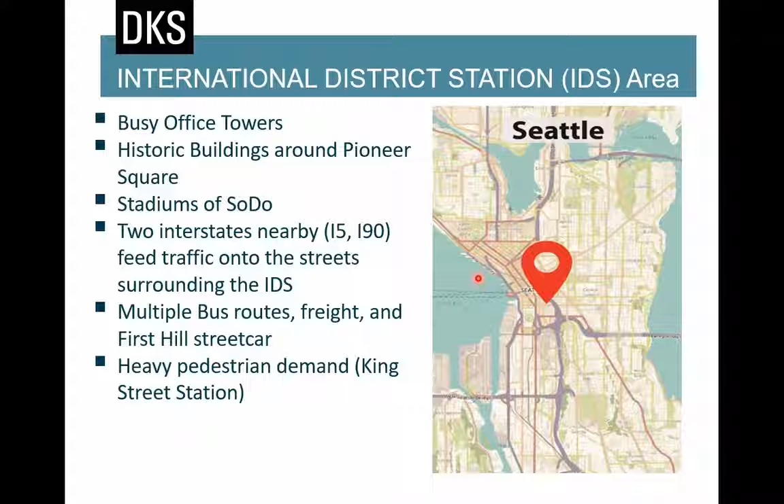this area. Because of the King Street station that is located at 4th and Jackson, we have a lot of peds in this area. So we have between 500 and 800 peds per crosswalk. So after I ordered the turning movement count, I looked at the report and I contacted the company like, are these numbers right? I want to verify the video. So they verified the video and I watched some of these videos. Yeah, some of these ped crossings are very busy because of the King Street station.

If we zoomed in a little bit, this is our study area. Again, it's in the southeast corner of downtown Seattle. And our focus area is basically 16 signalized intersections that are represented here in the black circles, and we have 14 unsignalized intersections. Our main focus is 4th and Jackson, but we also included all of these side corridors like 6th Avenue, 5th, Main, because as we'll be covering later on, King County Metro is interested in some rerouting, and these reroutes are going to use 6th Avenue and other corridors.

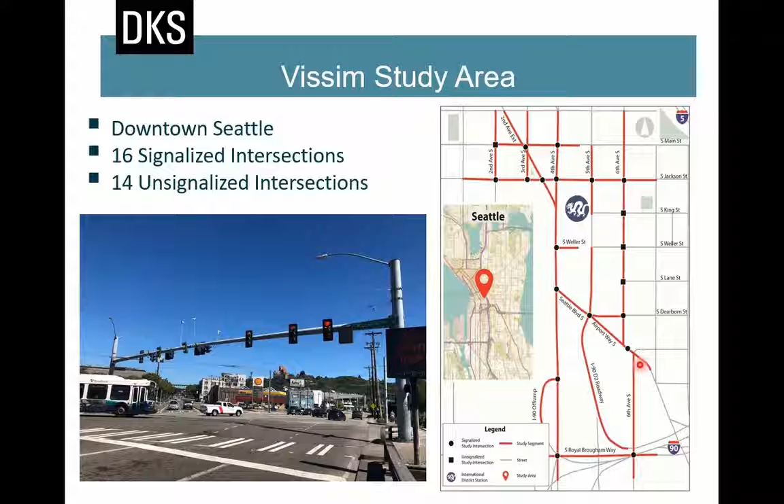For the geometry, we have some pretty unique and interesting intersections in here. As you can see here, one of the examples is the intersection of 5th and Seattle Boulevard. It's a 5-leg intersection. Here we have the D2 ramp. It's basically a transit ramp. If you are looking at the westbound approach, we have one westbound right turn lane and two through lanes. But for the downstream, we have one westbound right, one westbound left, and the middle lane is basically a shared through, right and left.

So here, if you're looking at northbound 5th, it's basically one lane. For the southbound, it's two southbound left turn lanes. If you're looking at southbound right, it's a slip lane. If you're looking here at the intersection of 4th and Jackson, we have here a right turn pocket lane because this is a very heavy bus area. After that, we have a BAT lane. Here we have two GP lanes, and another bus lane serving this transit area after crossing the intersection. So it will be nice to test Vissim 10 and how Vissim 10 is going to handle the conflict areas of some of these interesting intersections.

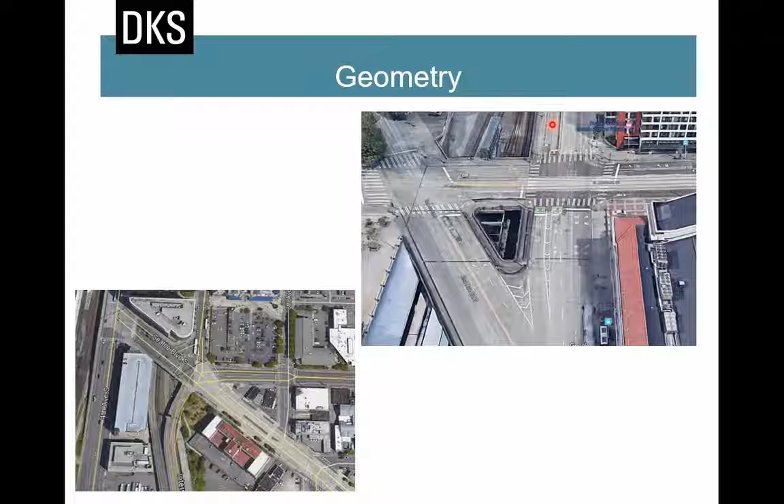What DKS was tasked to do. So basically our main scope is covering three main topics. The first one is to test the impact of all the upcoming route changes. So as I mentioned earlier on, King County Metro, Sound Transit, and Community Transit are making a lot of changes because of the D2 ramp closure. They are also changing the headways of these buses that are running along 4th Avenue.

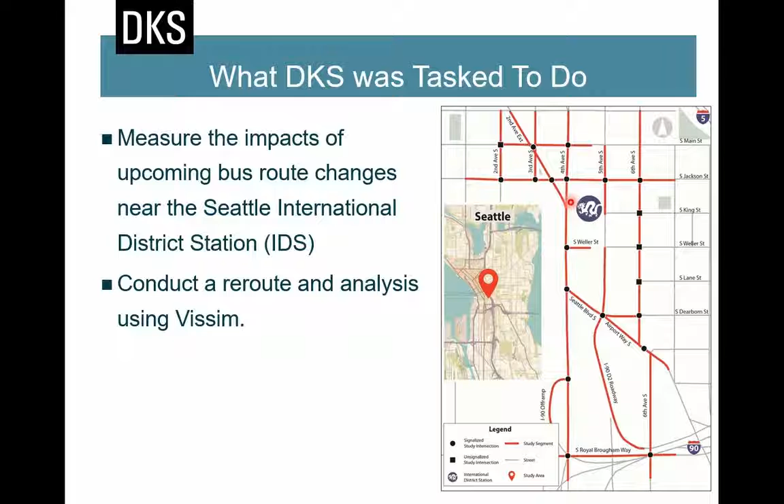They also want to test which reroute they should consider. Should they consider this alternative, like instead of moving along northbound 4th, should they take this route, or should they take north and after that turn right at Seattle, then left again at 6th? They are also considering adding one more bus stop. So this bus stop at northbound 4th and Jackson is currently serving two 60-foot buses, and they would like us to consider adding a third 60-foot bus stop. So it's basically gonna be a longer bus zone.

Part of our scope is also to consider how we can improve the operation along 4th Avenue. So here for the I-90 off-ramp, the current configuration is basically 2 lanes and an eastbound right turn lane. And the middle lane can serve the eastbound right and eastbound left. So they were asking us what is the best channelization for this off-ramp. Should we keep the middle lane as it is right now, or should we change the configuration to something else? Which is pretty interesting because all of this needs a lot of iteration, a lot of testing.

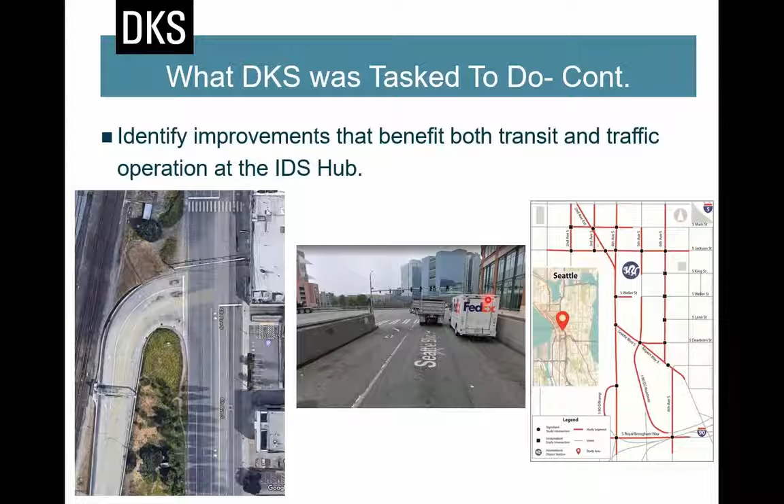Another example is the intersection of Seattle Boulevard and 4th Avenue. They also asked us if we can help them with this middle lane. Should we add it to the through-right or to the through-left?

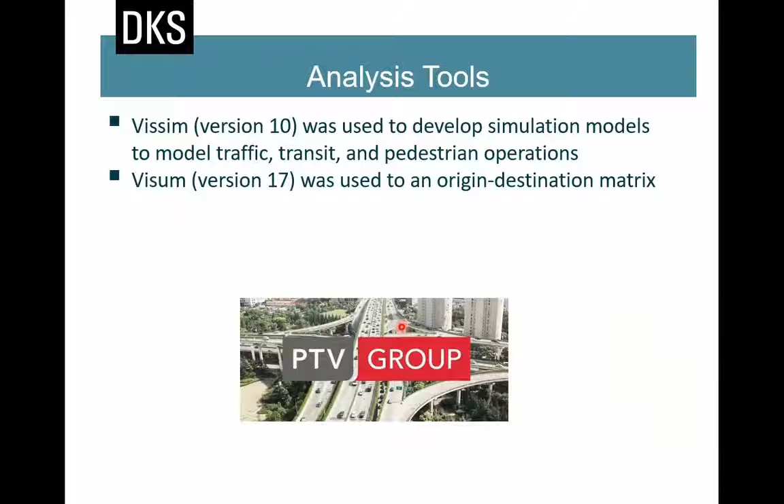The main analysis tools we used in here are basically Vissim 10 for the micro simulation work, and we used Visum 17 for the OD and static routes, and we used the dynamic traffic assignment for this work. My colleague Matt is going to cover some other slides.

So they wanted to look at some additional stuff that affected more of the GP traffic directly as well, and that was a couple turn restrictions. You can see the red dotted line paths are where the existing turns are available, but they wanted to take some of those out. So we had to account for that in the model.

And then just to touch on the congestion in this area, it's a pretty congested area. It's just south of downtown a little bit, downtown Seattle. So AM, PM peaks are very busy, and this area is very busy in both peaks. The inbound, so northbound on 4th Avenue, is busier in the AM peak, so the queues can extend a long ways there. It's still busy in the PM, but a lot of the PM traffic is more in the southbound direction.

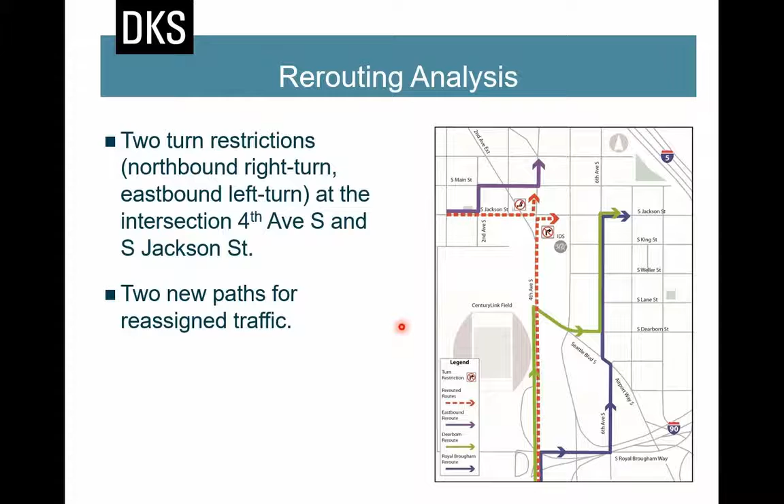So we did an alternatives analysis. They had several alternatives that they wanted us to test. It was only on existing years, so that was kind of nice. We didn't have to project out any volumes or anything because they wanted to capture the impacts of doing these things right away. So existing conditions model with current traffic volumes, current traffic signal timing, transit routes created and calibrated to generate a baseline model for our comparisons. And then we had 4 other alternatives.

And then transit, so in addition to what Sherief was describing, there's an existing transit tunnel that runs underneath downtown Seattle. So when we did this analysis, the light rail and buses were both running in the tunnel. So as part of this project, they wanted to pull all the buses out of the tunnel, and so we had to measure the impacts that would have on the surface traffic.

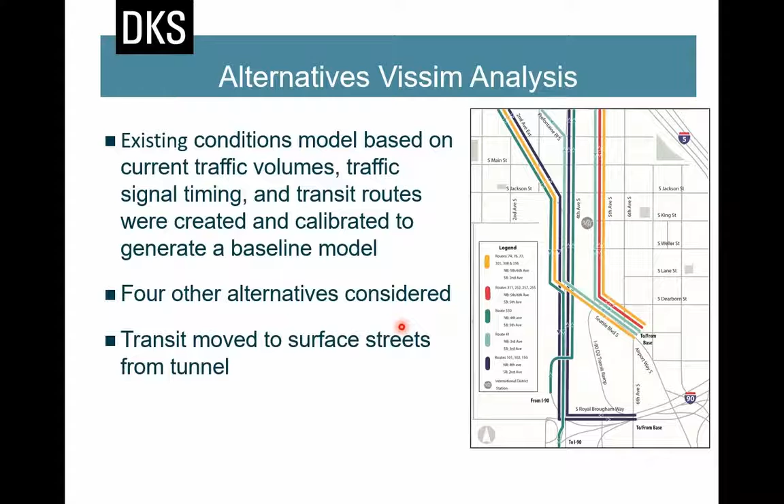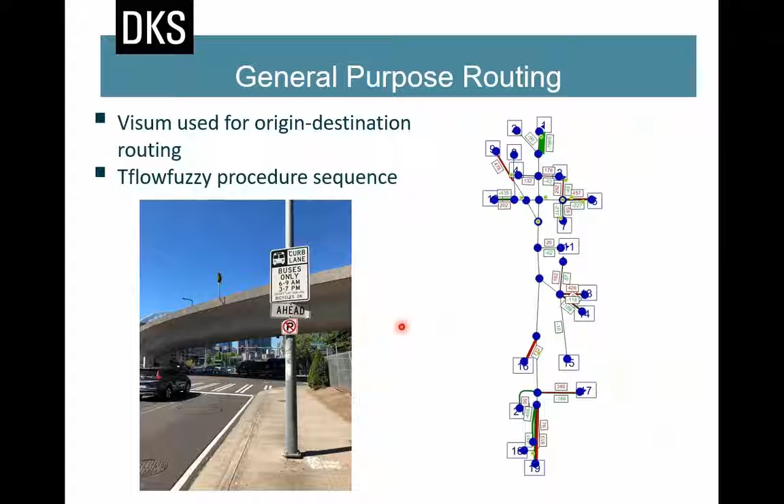So we used Visum to generate the OD matrix so that we could import that into Vissim. Visum used the TFlowFuzzy procedure sequence, and then we brought that into Vissim and used DTA to generate the static routes.

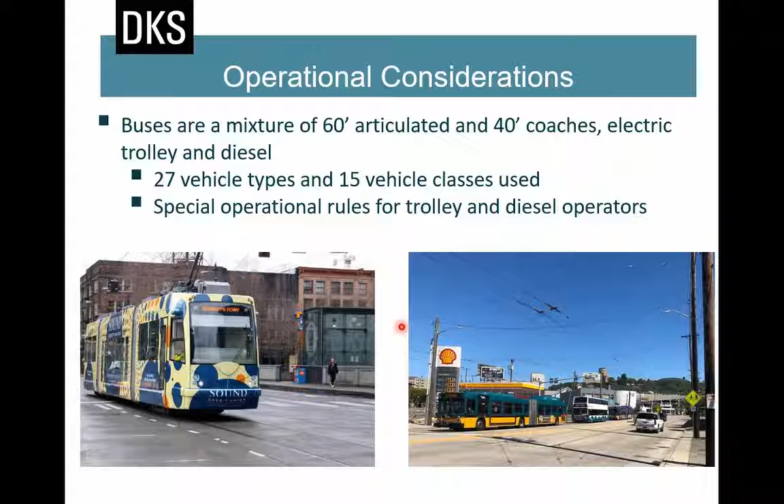One thing to consider with this as well is that a lot of the modeling was dependent on how well the bus stops could perform, so it had to do with bus stop capacity. We had to use 27 vehicle types and 15 vehicle classes so that we could break up the different types of coaches in the model. King County has a mixture of 60-foot and 40-foot buses, and then they have a mixture of electric trolley and diesel buses. And for any particular route, they can have a mixture of all 4 of those things. So we need a lot of vehicle types so we could capture the stop capacity well.

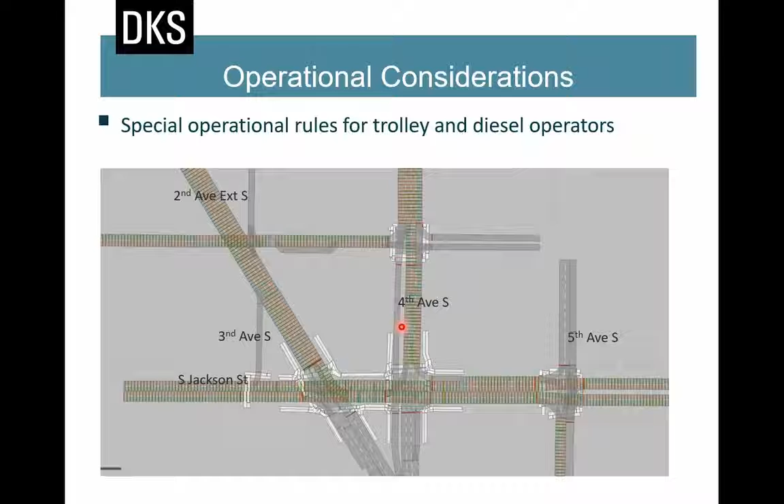Essentially what these are doing is there's streetcar and trolley bus operations here. Typically in most areas there's only one set of trolley wires, so they can't actually pass each other. The streetcar obviously can't change lanes, but the trolley buses can. So we needed to incorporate something that would make it so that the trolley buses couldn't pass each other, and they couldn't pass the streetcars either. And along with the trolley bus operations, there's lots of special operational rules that apply to them, and Sherief will cover some of those.

So as Matt mentioned, just setting up the priority rule was pretty tricky. These are some of the parameters we used for the priority rule. We basically wanted to make sure that trolley buses are not passing the streetcar or the other way around. Before putting in any of these priority rules, we found trolley buses are passing the streetcar. The model was running in a pretty funny way.

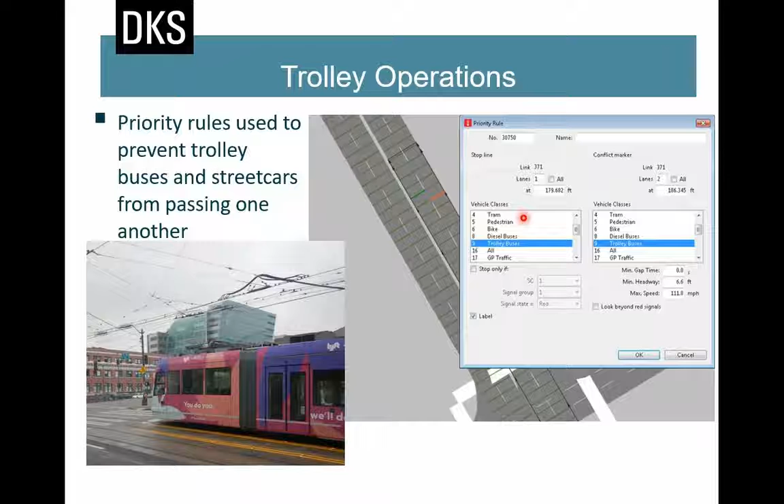We also have some pretty interesting special work zones because of all of these wires. So we went to the field, we collected where these wires are located, and we also set some meetings with our client, King County Metro. We wanted to mimic all of these wires in our Vissim model. But more importantly, we wanted to mimic the driving behavior.

So we started to implement some of these reduced speed areas in our Vissim model. At some specific locations, all of these trolley buses are directed and they just got used to slowing down whenever they get into the intersection or are done going through the intersection.

So we started implementing some of these reduced speed areas. And they're instructed to slow down because if they drive too fast where the wires cross, it can pop the arms off, and then they have to go back there and try to get back on, because the bus stops because they don't have any power.

Yep. And there are some specific locations where they can cross each other, but these are basically like emergency locations. So they are directed not to pass each other unless it's an absolute necessity.

While we were working on this project, we had some different stakeholders. So number one, the three transit agencies gave us the bus routes and which corridors they are going to run on, but they didn't give us any schedule. And they asked us, can you help us with a future schedule for this one?

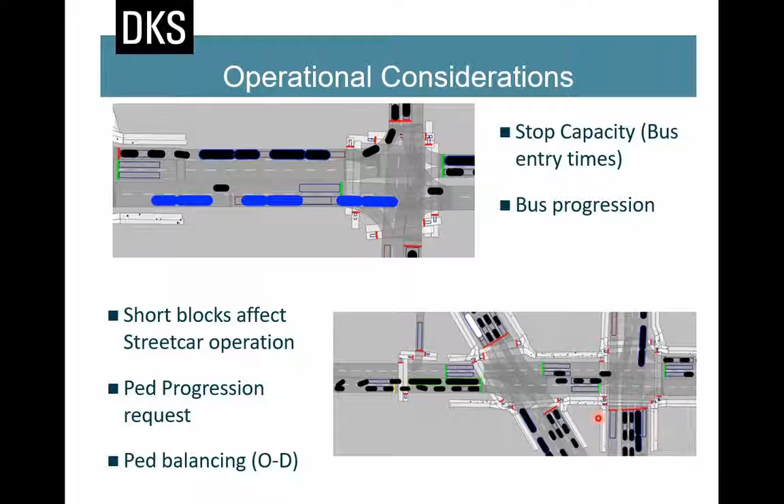For the lane change, based on our field work and the feedback we got from the transit agencies, south of the I-90 off-ramp, it's basically GP lanes, but north of the off-ramp, we have a BAT lane, and after that, the GP lanes. So if a bus is stopping at this bus stop on the east side of 4th and Jackson, and the bus is heading northbound, the bus will basically keep driving on this lane, after that drive on the BAT lane, till it serves the passengers at this intersection.

But if the bus is moving north without stopping at this specific bus stop, we found from our field observations that bus drivers, even if they have a BAT lane, don't really drive on the BAT lane. They prefer to just keep driving on these GP lanes without going through all the hassle, buses, GP, and all of the congestion at this intersection. They just skip the BAT lane and keep driving north on the GP lane. So calibration of this area was done using the lane change parameters in Vissim.

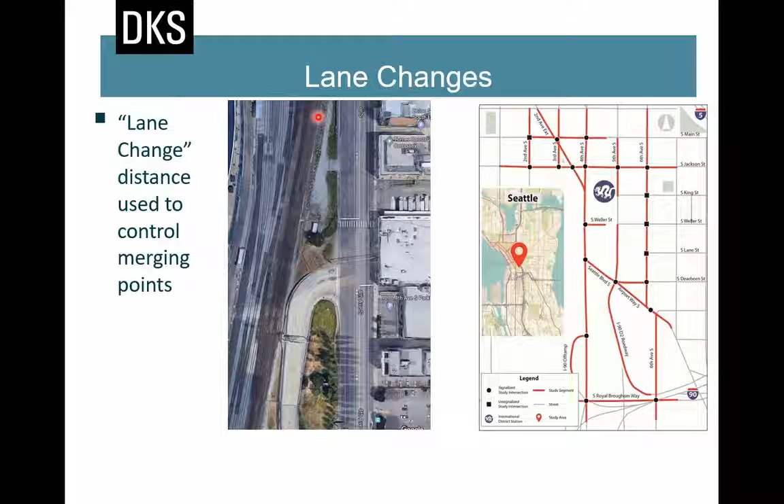Matt will cover a few more slides. So, like I mentioned earlier, we calibrated it. The calibration was mostly travel time based and then these other things as well. But the travel time was mostly focused on the transit since that was the best data source. And then we also calibrated on transit volumes since there is a lot of transit here.

So we incorporated, Sherief described some of the bus stations, some of the bus layover areas that they had there. So we incorporated deadhead buses and buses that were traveling to their routes and stuff like that. Just north of here, I know that 3rd Avenue has over 100 buses per hour in each direction. So there's a lot of buses in this area. And we calibrated based on general purpose volumes and then our field observed queuing.

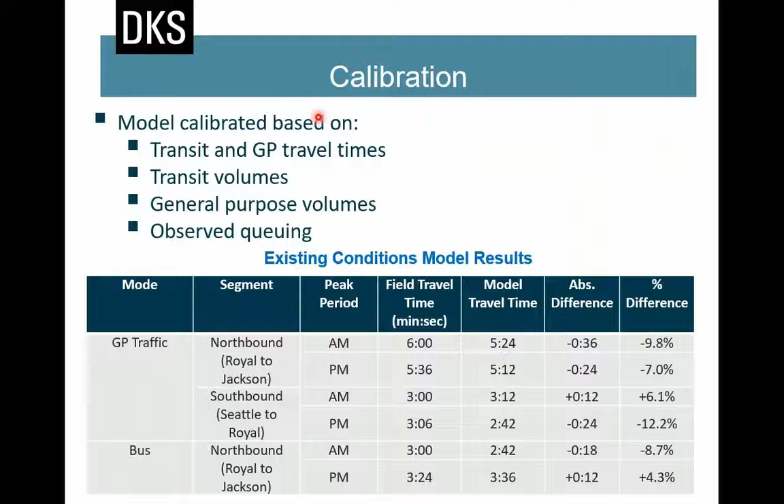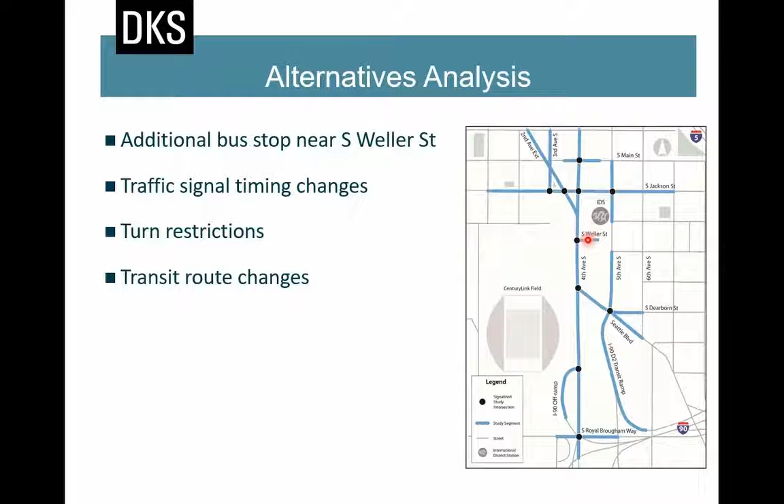So these are basically the alternatives we looked at. We looked at an additional bus stop near Weller Street, and then traffic signal changes, those turn restrictions that we previously described, and then transit route changes.

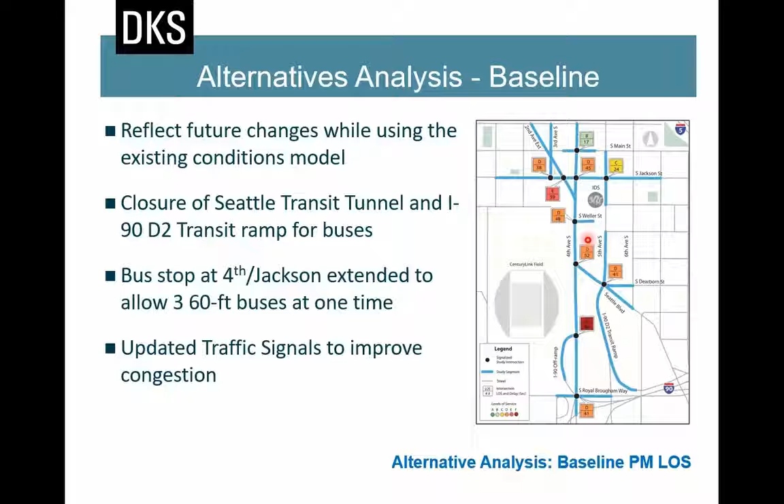So like I said earlier, all of our future things, we didn't have to go out into a future year. Everything was for the current year. And then we incorporated, like Sherief described, the closure of the I-90 ramp that was buses only, and then increased stop distance because it needed more capacity, and then updated traffic signals to improve congestion.

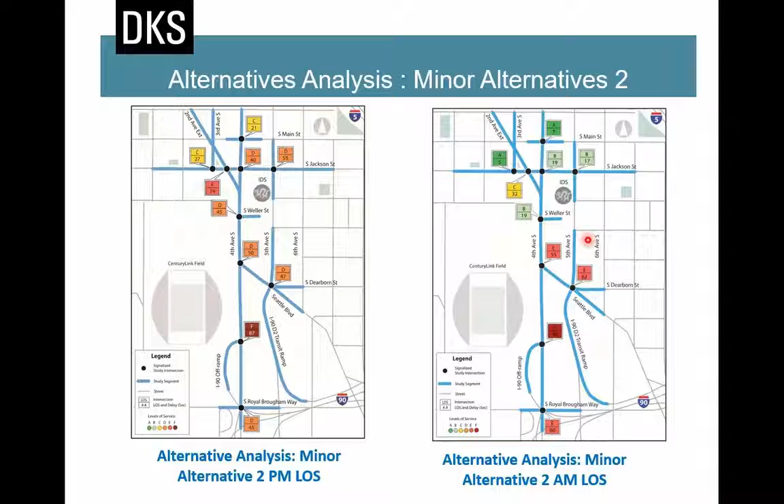So these are kind of the results. These are just some level of service results, so you can see that. AM functions fairly well on that northern part of the area, whereas the southern part is just pretty bad no matter what. And then the PM is just a little bit busier in all portions of it. But I think one of the main things that we got out of this is that the transit agency, King County, could incorporate a lot of these changes without having significant impact to traffic.

So what did Vissim and Visum help us to do? So Vissim allowed us to model complex transit operations on a congested network of intersections, and then the results informed all the agencies involved of what they wanted to do and how that would impact the area. And then what I liked the most is that it let them have very targeted solutions to that.

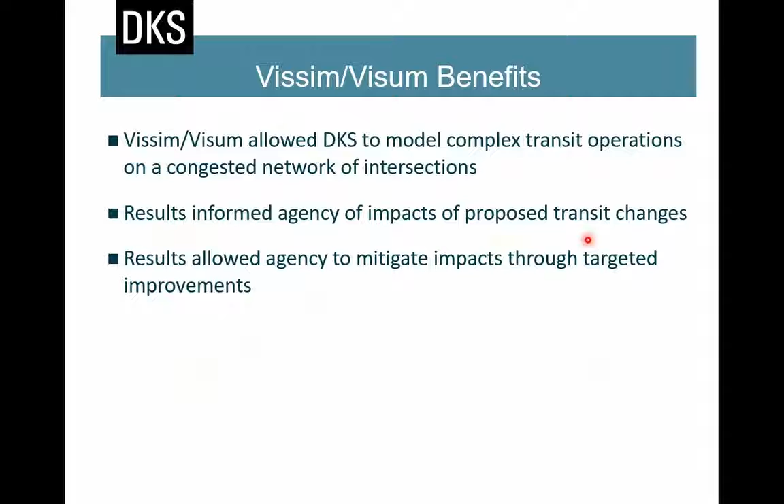So instead of maybe going overboard on a huge fix, trying to change something on a big scale, they're able to say, you know what, if we just change the length of this bus zone, or if we move it to a far side or a near side stop, it'll do what we want. So it allowed us to do very targeted improvements.

Besides these transit benefits Matt talked about, we're also able to provide King County Metro and SDOT with some of the channelization changes they can do at the I-90 off-ramp and the intersection of 4th and Seattle Boulevard, 5th and Seattle Boulevard. So this is one of the changes we proposed. Instead of 2 lanes and a right turn pocket, right now this is the configuration they went and moved

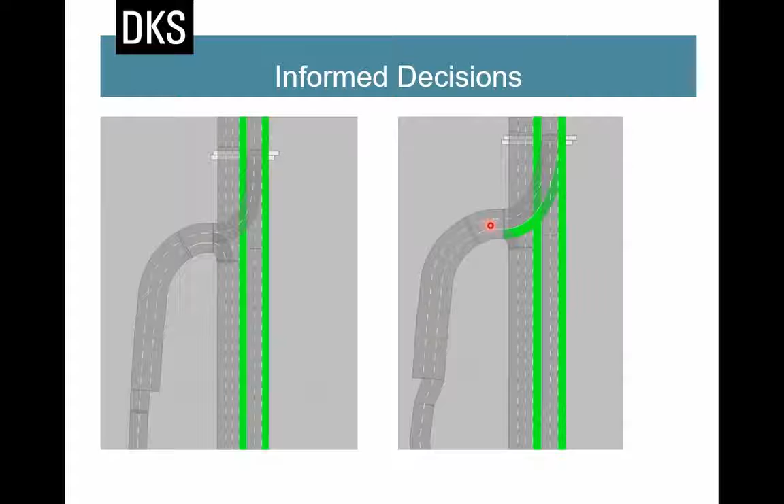forward with. Basically, the right turn is going to be a right turn lane instead of a pocket, and the same right turn is going to be a transit lane. So only transit are allowed to use this lane if they are turning for the eastbound left turn movement. The other 2 movements are basically eastbound left turn.

I'm happy we are on time. It's time for questions. Can stop the stopwatch. 6 minutes. Yeah.

So I'm not a modeler, and I'm just curious to know, why do you need to build the catenary wires into the model? Well, we didn't have to build it in, but we had to capture what it meant for the transit. So like we said, it had a big impact on how buses are able to proceed because they couldn't necessarily pass each other. And then everywhere where they cross, buses are instructed to slow down. So we had to go out and observe where that happens because the buses are supposed to slow down going into those. But in the model, can you set the parameters on speed?

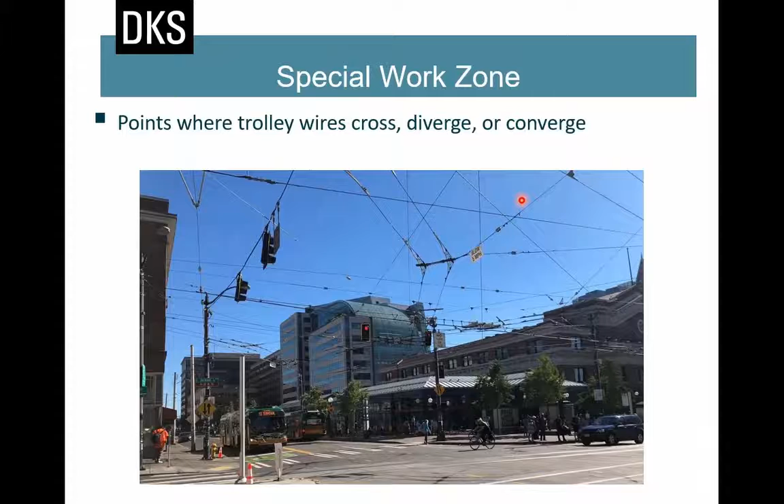Yeah, it's basically a reduced speed area. So we assign this reduced speed area for all of these buses. Whenever we have crossing wires, we basically started to place these reduced speed areas. They weren't necessarily in the same place at every intersection. So this is an example where the crossing was in that area, and then other places they'd move around.

Do you think the lane change distributions by vehicle type could have been a way that you could have combated the lane changes? Yeah, I think that would be really helpful. Because we had to make decisions because we would sit down with the client, they'd watch it with us, and they would say, we want the buses to change lanes right here. And we'd say, okay, we can do that.

But what we ended up having to do because of that is some of the lane changes we had to make shorter because they wanted them to cross in a certain place and then not change that. So we had to make some of them shorter, some of them longer, and the GP routing was affected by that.

Yeah, and besides what Matt mentioned, we also started to redirect some of our transit lines using some specific connectors. So if we see in the field that these specific bus lines are not using this lane, we started to force them to change lane in this area, just to make them match what they are doing in the field.